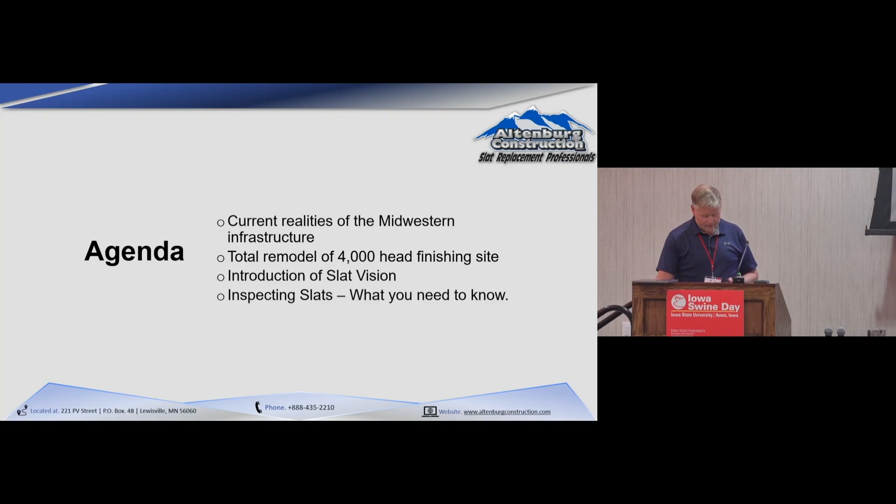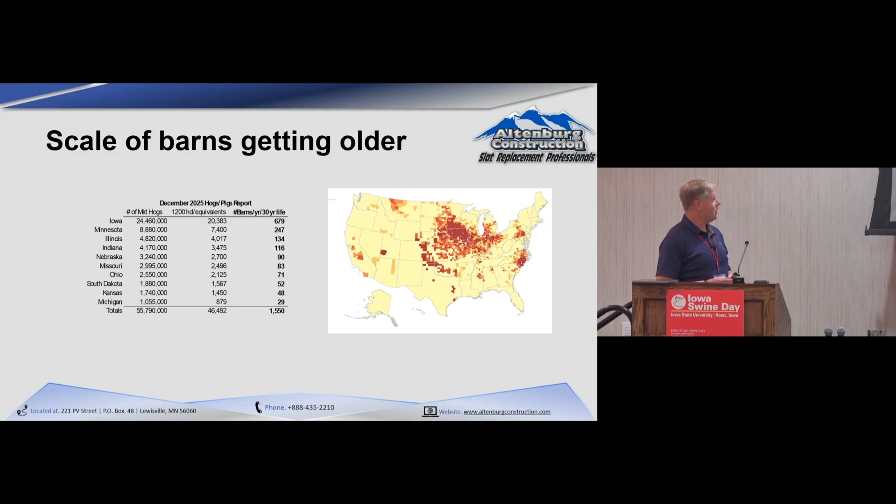So one of my roles when I came to Altenburg was to try and understand the size and the scope of what's coming at us as an industry. And so I've just backed into the December 2025 hogs and pigs reports, and I basically said how many hogs sit in each state. I'm assuming those hogs are in a 1,200 head barn or a 1,200 head room, if you will. And then I'm just assuming that that facility had a 30-year life. Now, the curtains don't last 30 years. Most of the roof steel won't last 30 years. The gating, this is all. But in general, from a slat and beam perspective, that's about the most you're going to get out of these.

And so if you back into all that, basically what it says is, for the state of Iowa, there's 680 barns that are aging out every year, right? If you assume we built those confinement facilities over the last 30 years evenly. And so if you take really the pig producing states in the Midwest, that's about 1,550 barns of 1,200 head equivalents that we're aging out a year, okay? So that either means we need to put a lot of money into these or we need to build new ones and tear the old ones down. And if you haven't looked at the cost of new construction, which I'll get into in the next few slides, I don't think that's going to be a real viable option for us.

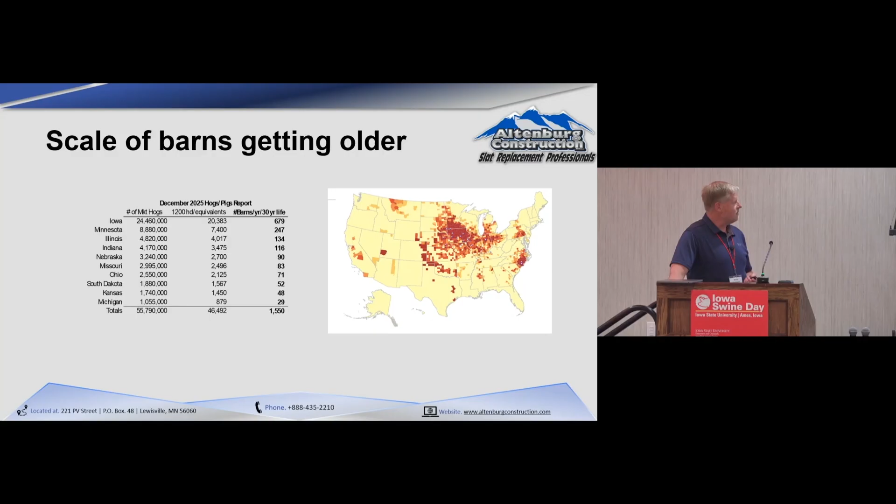These next few slides I got from Dusty Compart with Compeer Financial. He gave this presentation, I think it was a year or two ago, and I found it really interesting. And so this slide on the left, basically, the bars are the cost per pig space to build a finishing barn, and then the yellow line is the interest rate over that same time frame. So we kind of had a perfect storm, if you will, from a cost of production standpoint where, just prior to COVID, let me back up.

When I started building a lot of barns in 2017, we could build a turnkey tunnel vent deep pit barn in the Midwest for about $285 a pig space. Over the next 4 to 5 years, just prior to COVID, when we finished construction, we were probably building them for $385 a pig space on the last ones. Those same barns today are $425, $450 maybe in Minnesota.

But it's the combination of the inflation we saw during COVID that hit everything, and pig barns and the materials to build them were no different, combined with, we were building those barns with 4% and 5% capital, and today it's 7-8% capital. And what they figured was an 11% increase in building costs was about equal to a 1% increase in interest rates. So at the same time, we got rapidly appreciating costs to build these barns and rapidly increasing cost to finance these barns. So what's the message behind that? Trying to cash flow these under this model is very difficult, particularly if you're a contract grower.

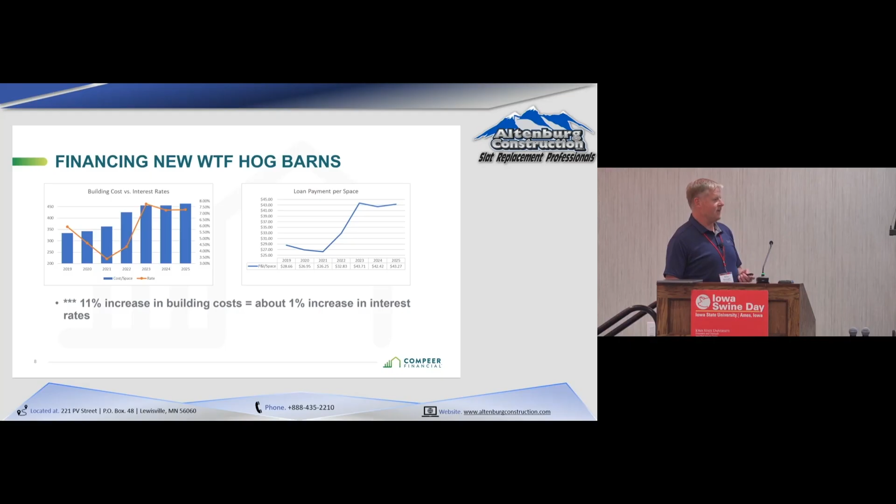And so will we build some new barns? Yes, but unless the economics of this change, you can see on the chart on the right, in 2025, it took $43.27 just to service the debt. So who wants to sign up for a 20-year note just to get the manure, right? That's not super appealing. And so that kind of gets into what are we going to do with these existing facilities. Something else they looked at was the farms that are up for sale, what are they going for? And so they categorized them basically into 3 categories.

A 90s to 2000 usable barn. It's not terrible, probably had some work done on it. Those are being sold at $150 to $225 a pig space.

The total overhaul barn that's had very little care and upkeep is basically worth the footprint it sits on, and that was probably being valued at $100. Those guys probably built those things for $120 to $150 a pig space. Then there's the overhauled barn that's had significant improvements, bringing $250 to $275.

And the point from their standpoint, from a lending perspective, is there's a large amount of 90s and 2000 barns that are requiring reinvestment in them.

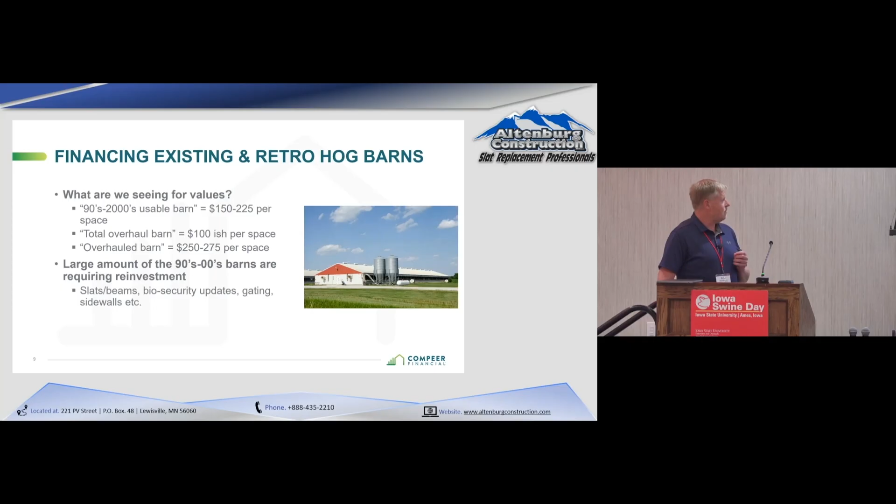And then the last one was just, if someone's going to buy that facility, what are they going to loan on it? How far will they go on a loan? And what's going to be the loan payment on that?

Usable barn at $180 a space, they'll only finance that a max of 7 years. With an 85% loan to appraised value, that payment's about $27.50. Conversely, if you have the overhauled barn, they will finance that for an additional 5 years because it has more useful life. Not much difference in the cost per pig space from a loan repayment standpoint.

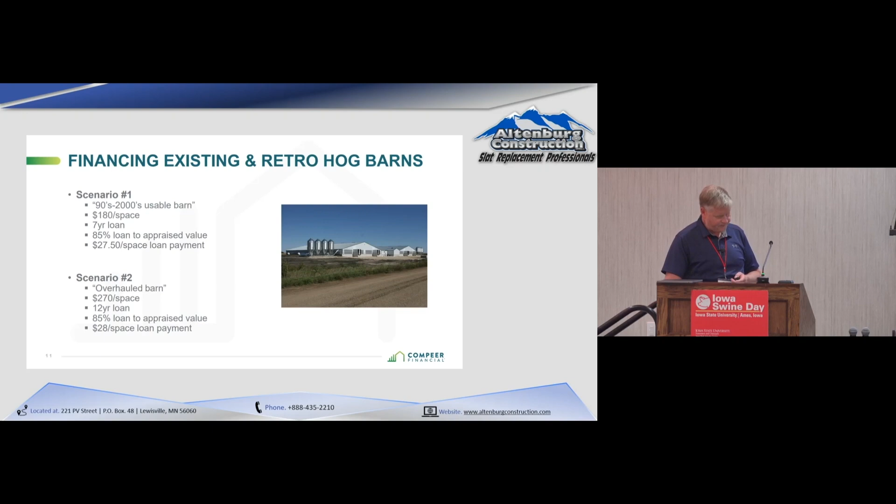So that's kind of broadly the base of what the industry has out there in the marketplace.

We had the opportunity as a business, this would be December of 2024. There was a facility northwest of Fairmont, Minnesota. It was a 4,000 head facility, 2 barns. It had been severely neglected, as you'll see here in the next few slides. It was in receivership, so it was in bankruptcy. It had not had hogs in it for 5 years.

I wish we'd have flown a drone over it at the beginning because it would have been better, but I'll show you a few of these photos. For you Gen Zers in here, the term I think you'd use is these facilities had left the chat, so to speak, and were in pretty rough shape.

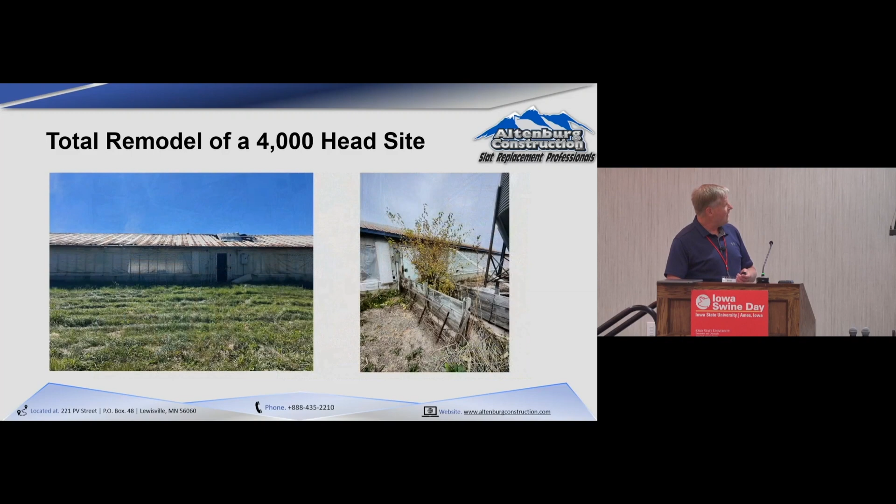So I think this is as bad as it can get, and I can show you what we did start to finish and what that cost. Incidentally, that wasn't the worst part of the roof. We'll get to that.

So again, ceiling falling down, bulk bins full of feed. You can imagine what that was like sitting for 5 years with water leaking into them. The steel was a little thin in spots on the roof.

Oddly enough, the trusses were in pretty good shape. All we really had to do was replace the purlins, those cross members that we screw the roof steel down into. We did have to plate all the trusses.

Something else to note on this site, there was no connecting hallways. The load chutes, in southern Minnesota in January, that's not a real desirable way to load hogs. And single bins on a single room, so they weren't in tandem, any of those sorts of things.

In most cases, you're not going to have to drop a ceiling and re-insulate a facility. But because this had so much water in it, that R value was pretty poor. We were going to make this a wean to finish barn, and we knew we needed better insulation. We knew we needed to plate the trusses, and all that gets a lot easier if you just drop the ceiling and start over, so we made the decision to do that.

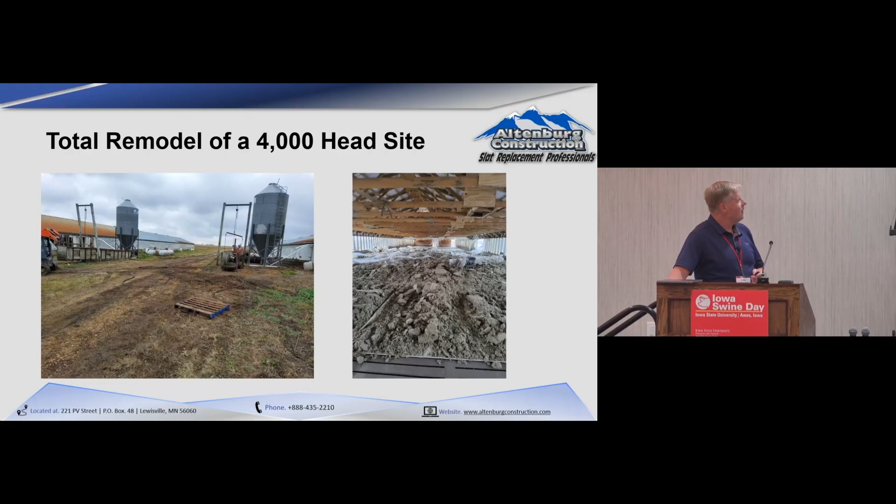This is the final product. When we got done with it, it took us about 2.5 months to do that.

As you can see there, we completely reskinned, re-insulated, new ceilings, actuated inlets, all new curtains, all new hog panel. We doubled up the bulk bins, so we had to buy 4 bulk bins and re-pour those. We brought them all to the front half of the site.

We made a connecting hallway with a concrete chute, covered. We put showers in the site.

Something else that was pretty significant, which you wouldn't normally have to do in a facility like this, is we had to drill a well because this was part of a bankruptcy. We were pulling water off a building site just to the northeast that you can't see, and trying to get an easement on a well in bankruptcy is complicated. We just decided it was cheaper and faster to drill a well.

That was a significant expense we had. In the back corner, you can't quite see it, but the pig owner who was going to place pigs in the facility required a composter as part of their biosecurity, so we built one on site. Before we agreed to take this on, we had a contract with a pig owner interested in a long-term deal, which made the decision of what we did and how we spent money a lot easier.

Another interesting thing, we've been talking about AI this morning. This would have been around December 2024, when I started dipping my toes into AI. Our construction guy heading up this project came to me and said, hey, we've got to build a composter, what do I build? I don't have any idea, and I've had some experience doing that. I thought about it and figured I could go research extension reports, do the math and calculations, and figure it all out. But at the time it was probably ChatGPT.

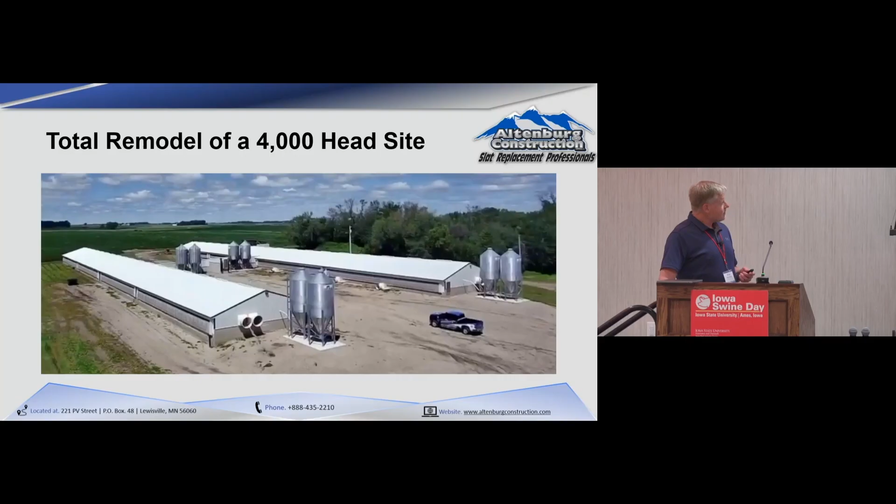So anyway, that was the site. The inside of it turned out really nice—all new gating, feeders, equipment. We did not have to do the slats on this business. I'll show you the prices here in a little bit and include slats in that, but full disclosure, in this facility we did not have to do the slats. The only thing that remained was the pit and the shell—everything else was new.

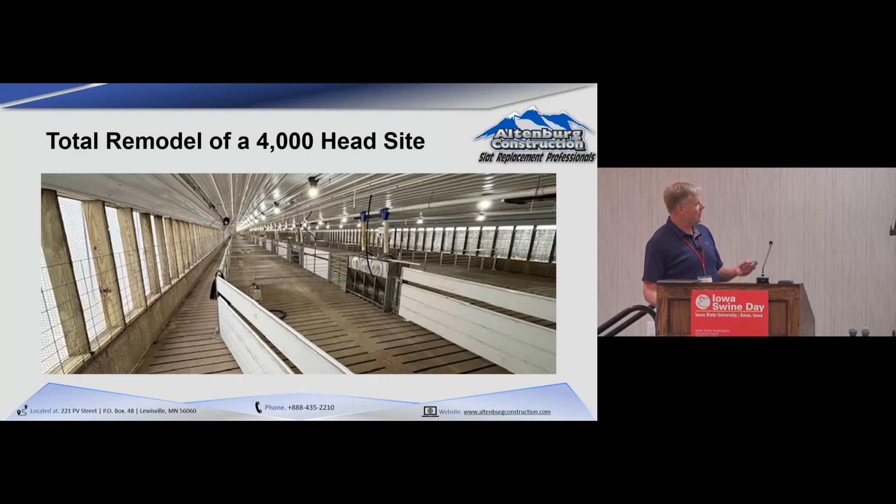So this is what we spent. Again, we didn't do slats and beams, but I threw that in there—if you were to do that on a per-pig basis on a facility like that, $80 would be the high side of that number. For the new equipment—gates, feeders, feed system, controllers, fans, inlets, heaters—we spent $87 a pig space. New roof, ceiling, curtains, and hog panel: in most cases you wouldn't have to do the ceilings, but we spent about $34 a pig space on that.

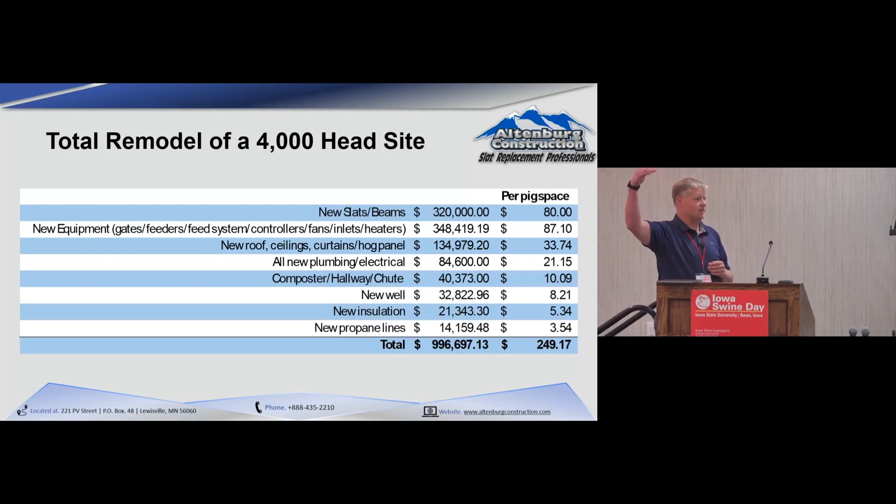All new plumbing and electrical was $20. Composter and the chute in the hallway was $10. The new well was really significant, almost $33,000. Insulation was $20,000, and the propane lines were that as well. So we did all that for just under $1 million, or about less than $250 a pig space. I think that's the absolute maximum—if you wanted to gut your facility, that's what you're going to spend.

Next topic I want to touch on is our slat vision inspection system. We developed this about a year ago for several reasons. Number one, we've been doing inspections for many years and it was kind of hard and clunky—the output took a lot of time and effort, and we wanted to refine that process and make it as objective as we possibly could. We also wanted it to be really simple and easy for our customers to interpret, so they can get a sense of the story behind the slats and beams in their barn. The third thing we wanted to do was give decision makers—since many of our customers have really large systems with hundreds of barns in some cases—better tools to work with.

We wanted to give them a roadmap, so if I've got $50 million of capital to spend next year, what are the worst barns in our system that we want to focus those capital dollars on? The system gives a nice summary for all the barns a particular customer has. And lastly, we wanted to speed up the process for us, so I can do an inspection start to finish in about an hour per barn, by the time I observe what I need to do and then provide the report.

We want it to be really simple and easy to interpret, and we use colors since most of our audience is men, which makes it easier for them. We're evaluating basically four things on the flooring system: the slat health, the beam health, and the column health, and then they aggregate and we give an overall barn score.

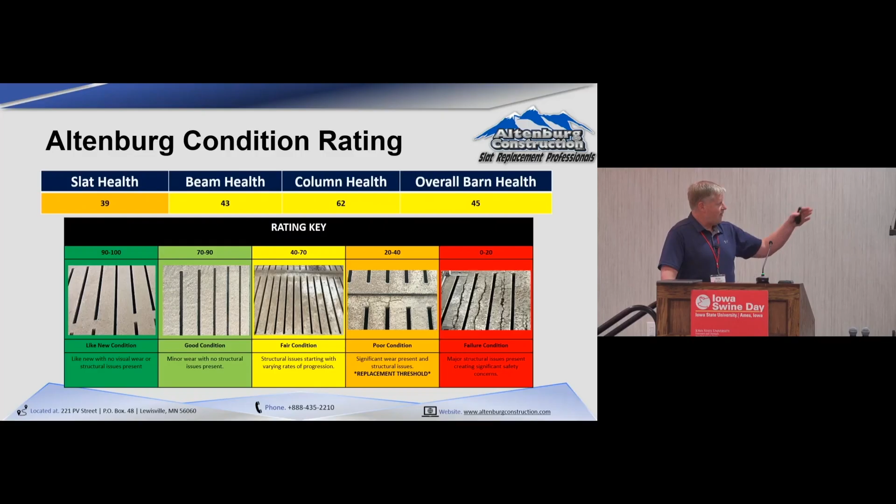You got to put it off, but you're probably 2 years away from that red category, so you need to make a decision, or start making one, if that makes sense.

So that's really quick and dirty. The reports can be 6 to 7 pages long with photos and all that. The other thing we do in that report is call out immediate issues. We'll look at barns and say, okay, your barn's got 5 years left, but you have an immediate issue in this one area we need to deal with. Don't put pigs in that pen until we get it taken care of. We call that out in a special section, and then we give a summary of why your barn scored the way it did.

And I don't know if I mentioned it.

One of the other reasons we did this is we've been doing inspections for years. We'd send a report off to a client, and 3 years later they'd come back and say, hey, didn't you inspect this barn at one point? We're like, yeah, well what'd you do with the report? Well, I sent it to X, Y, and Z. Well, they left the company 3 years ago, and I don't know where that report is.

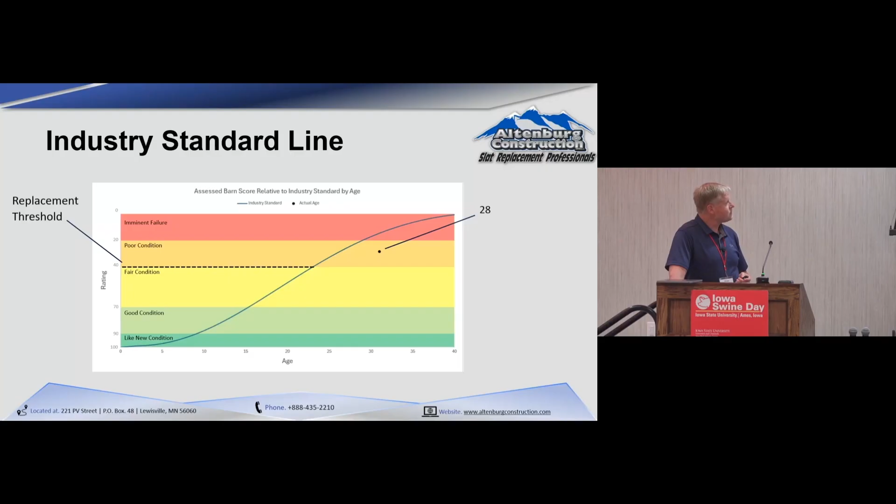I'll move into the last part, and we'll just talk about more of the mechanics of what we're looking at when we go into a barn.

The deterioration of slats and beams happens over 30 years, and it's slow. When you have these surface-bearing issues, which exist - and there's a ton of them out there - when they let loose, it happens quickly, and that's the result. So that's what we spend a lot of our time focused on: not only what types of cracks we're seeing, but more importantly, how is everything set in place, and how is that load being spread out over that area.

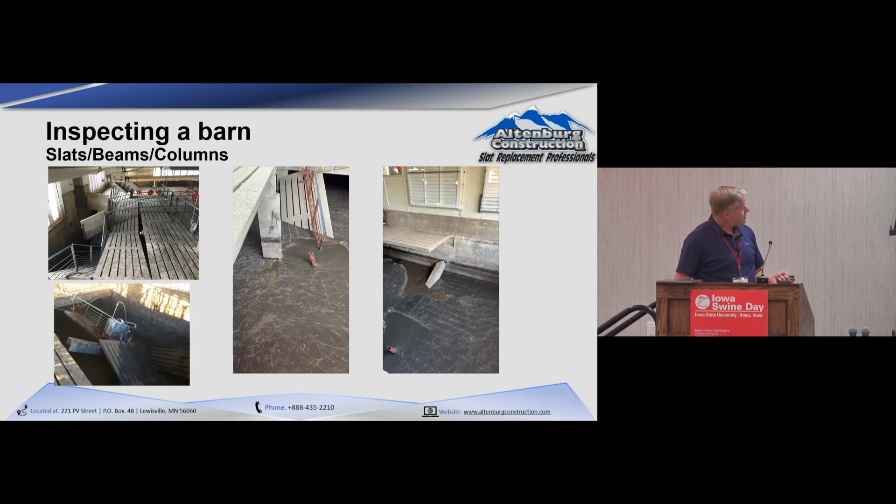So real quick and dirty, when we inspect a barn, people always ask, do you go in the pits? No, we don't go in the pits. If we have to, it's a much different price point - I can't imagine what I'd have to charge for me to go into a pit every day. One, it's dangerous, and yeah, it would be difficult. We can tell 95% of what we need to see from above.

We like it clean, dark, and dry. I love inspecting barns at night because when you've got a flashlight, it's all very easy to see what you need to. Occasionally - I won't say we never get in a pit - but it's usually on a cattle barn for various reasons.

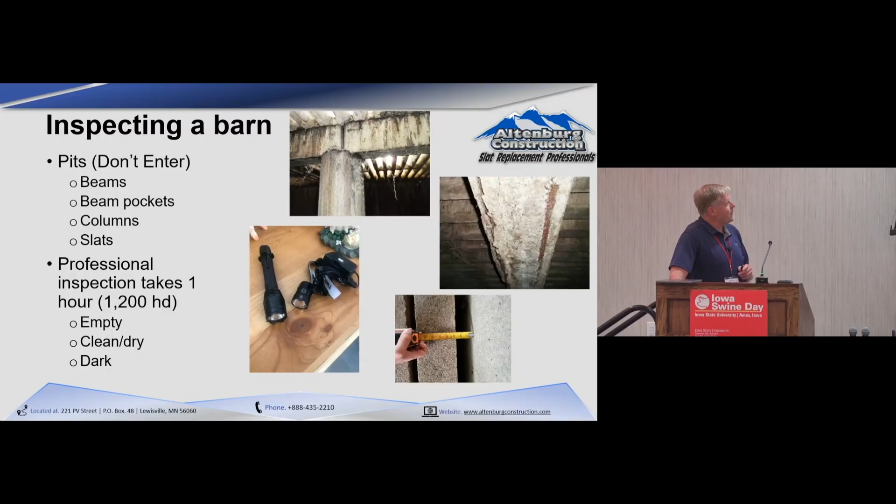So the beams, which the slats set on, and the beams set on top of the columns, they all age a very similar way. In this top picture on the top left, you can see those diagonal cracks right above the column - that's generally how they start. So when we're going through and evaluating, that's what we're doing: we're counting what cracks we see, how many of them, what are the cracks doing, how far have they spread, are they still on top of the column, have they moved off?

Eventually, over time, once that crack occurs, the rebar that's encased in that concrete is now exposed. And what steel does when it rusts is it expands and starts blowing that concrete apart. It starts creating that crack that chases across the bottom of the beam, and that's what we're looking at, measuring, and feeding into the report.

The problem with that is it gets really expensive for us to do that type of replacement. When we get them in that orange category, we can use our buggies and our equipment, and we can do it really quickly and safely. When they get to that condition, we aren't comfortable putting our crews and our equipment in those situations, so now we got to do it the really hard, slow, expensive way. And it basically doubles the labor cost on that slat replacement when you let it go.

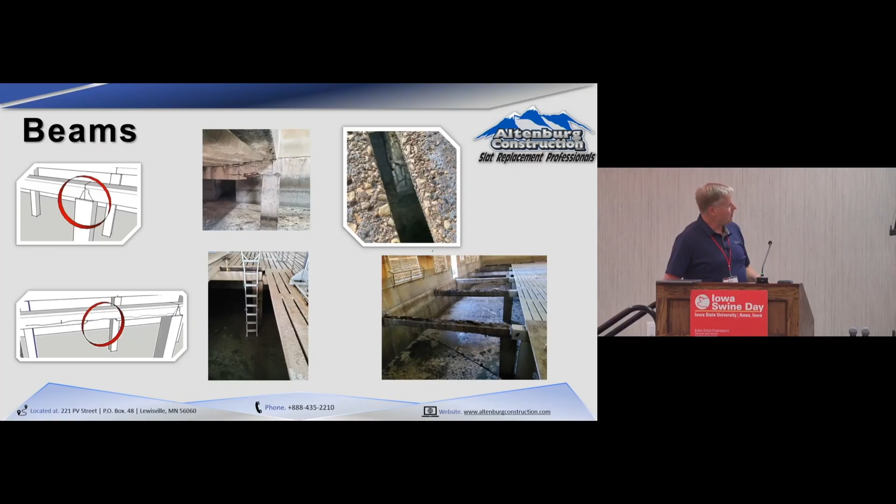Slats, they're the easiest thing out there. Everybody can see them. You're walking on them every day. They generally don't just fail all at once. They're failing very slowly over time. When you lose a beam, you're losing 6 slats all at once. A slat just doesn't typically go bad quickly like that. Once you start to see the crack on what we call the rail here, which is the length of the slat, it's in the rebar.

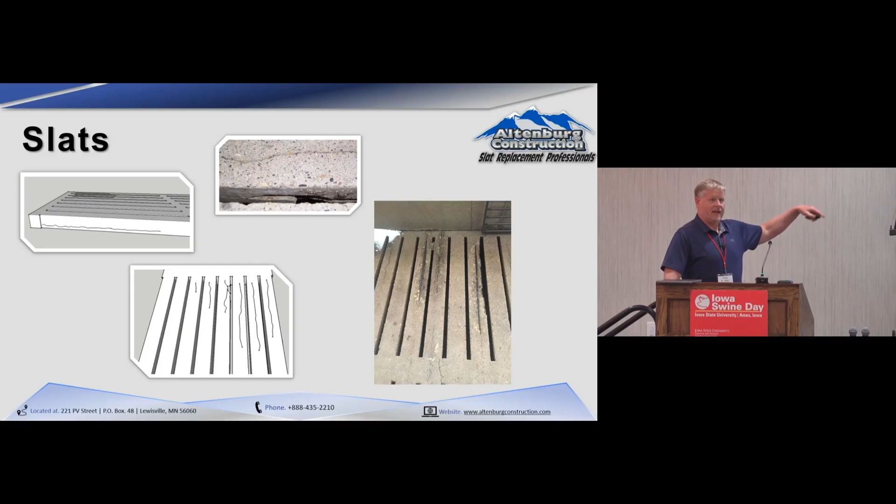So again, the number of these we see in the count goes into the formula, and that's part of the predictive nature of it.

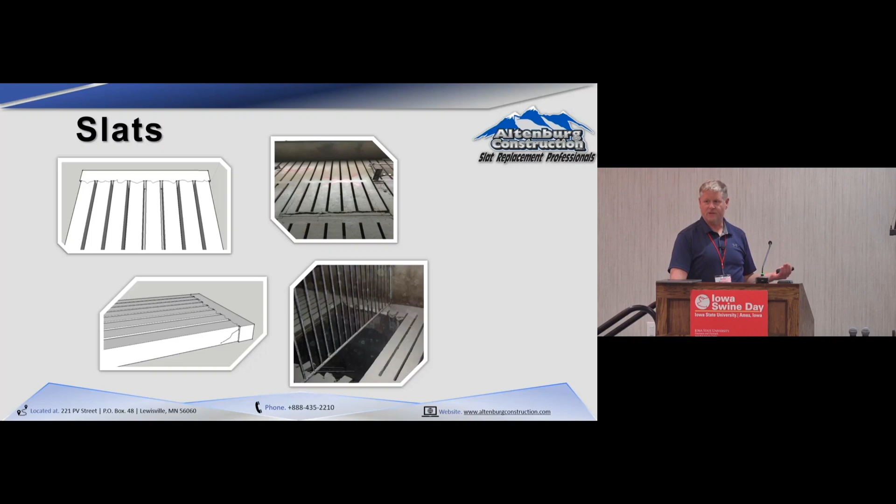Number one service call we deal with is beam pockets. It was a poor design. It's on the end of the barns. On all these 40 wides, we shoved a beam into the end. Sometimes they just weren't deep enough. Sometimes the installer didn't get it put in there correctly. And a combination of either that just shearing out.

Ultimately, I think what happens is these pits flex a little bit. We fill them up with 8 foot of manure. Those walls just slightly push out a little bit. We suck them down. And then that will get a water pressure rain event on the outside, and that wall moves in. It's just that millimeter every year of shifting back and forth where that beam walks out of that pocket is the best explanation I can get for it.

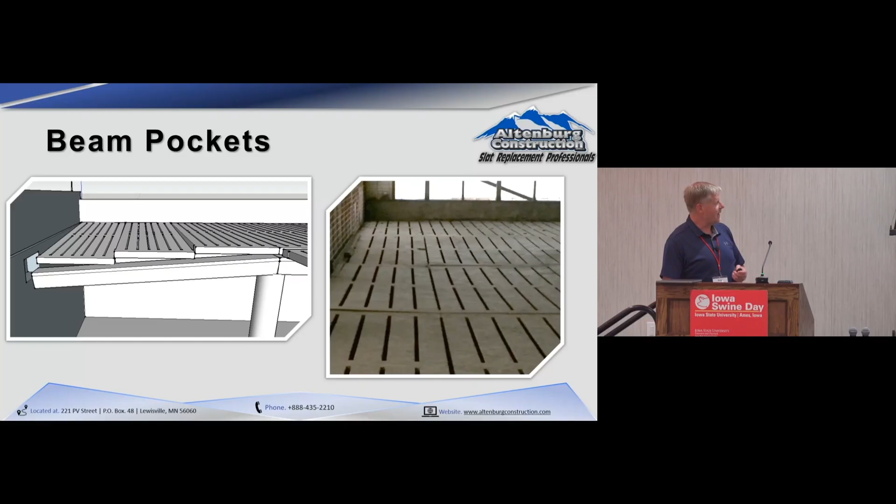Inside the barn, it just looks like a dip if it hasn't dropped in, but it's the number one service call. It always spikes in the fall for us. We get literally hundreds of these that we have to do repairs on.

And then what's it look like inside the barn if it hasn't dropped is it's just going to be a 2-inch lip. And so what I tell people all the time is if you're walking through a barn and you're tripping somewhere you've never tripped before, that's a problem. Get out of there, get the pigs out of there, and give us a call.

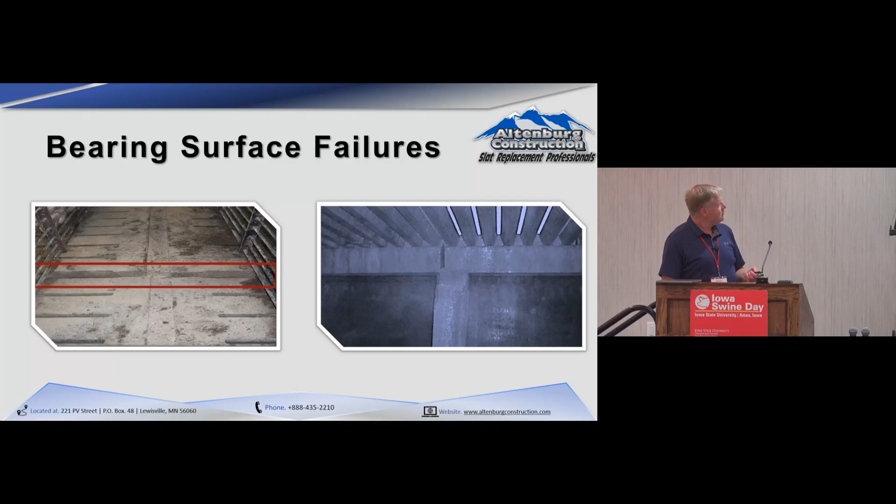And so unless the economics of this thing change, I think we're going to be doing a lot of that, which, I know there's a lot of builders in the room, is something to be excited about. The downside is remodels suck. They suck to bid. They suck to do because they're hard. It's more exciting to build new facilities. I'll be the first to admit that.

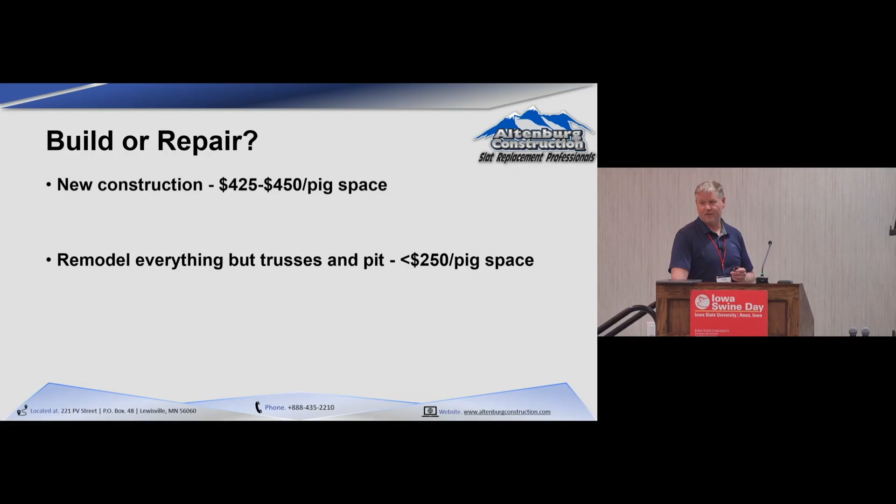And with that, I think we got a few minutes for questions. Yeah, we can take one or two questions. Okay. Gene's got one. Go ahead. I can.

As you've looked at slats, you showed cracks on the top, but didn't talk a lot about cracking on the bottom. That's where I would have anticipated seeing deterioration first. Is that right? And then secondly, do you like slat savers or not? Slat saver pads. It's the wrong name. Let me answer that one first. The question was, do I like slat savers? No, it's not a slat saver. It's a problem relocator, from our standpoint. It's a feed saver, right? So call it a feed saver mat. All it does is relocate the slat wear.

If you want to do something for slats, protect them or patch them. The key is you got to get that feed, those salts and that moisture into the pit as quick as possible. All the slat savers do is move it over. So if I was going to use a slat saver, I'd put a really big one in, and every 5 years I'd cut 12 inches off of it. I'd just keep relocating it. No, seriously, that's how I would use it. Or start with a really small one and keep adding a bigger one. But it's not a slat saver, it's a feed saver.